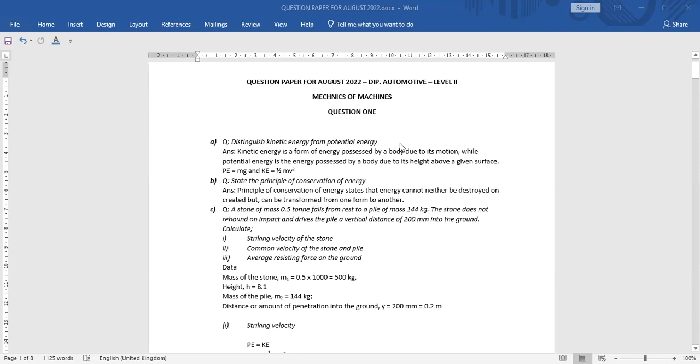So we are looking at the revision package for the question paper for August 2022. That's for Diploma in Automotive Engineering Level 2, subject Mechanics of Machines. Now, as the tradition, this is meant to just gauge your preparedness in this subject. So for each of the questions, you'll see definitions and then the calculations that follow. Now here, I'll try to pick up the first four, and then in the recording that will follow, part 2, I'll also pick up the other 4 questions.

So traditionally, let me start with question number 1. In question number 1, this question was saying distinguish kinetic energy from potential energy. So what is the difference between KE and PE? That's what it is saying. Now, traditionally, when you look at the two, the main difference is the fact that one of them deals with motion, the other one doesn't.

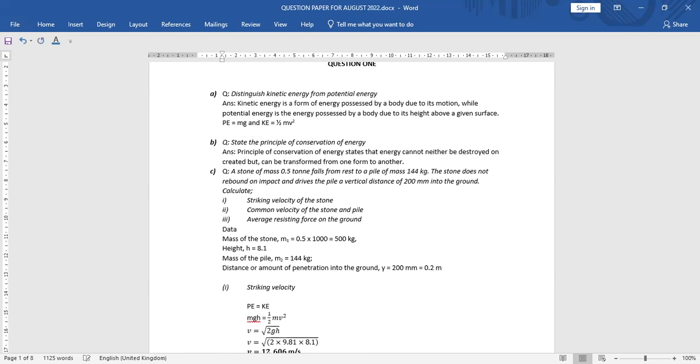But whenever you're trying to distinguish, the best way to do it is to define them in full. Here we're saying that kinetic energy is the kind of energy a body in motion possesses. But potential energy is that kind of energy which a body possesses due to its height above a given surface. Then, to make it complete, you also add the formulas. Now the formulas, please don't misuse them. Those formulas are meant to support what you're writing. When they say distinguish, you don't just go and put the formula and move away. You put them there after you define.

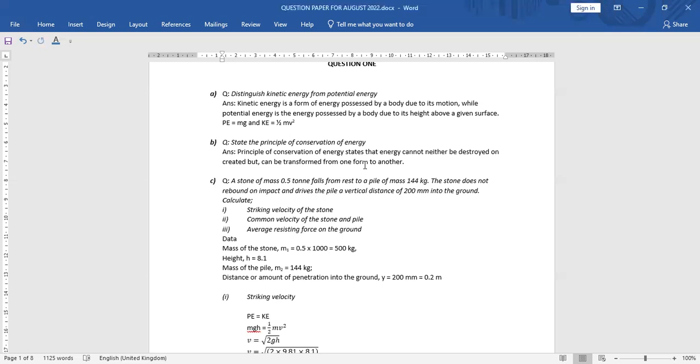Principle of conservation of energy. Here we're saying that you can neither destroy nor create energy. But what happens? That energy has to be transformed from one form to the other. So the question that we had in part C is that we have the mass of the stone, 0.5 ton, and it falls onto a pile without rebounding, driving the pile straight into the ground through a vertical height of 200 millimeters.

Now, the one thing I didn't copy out in the question is that a stone of mass 0.5 ton falls onto a pile of mass 144 kg through a vertical height of, according to that question, 8.1 meters. The condition is that it doesn't rebound. Part 1 is asking for the striking velocity of the stone, the common velocity of the stone and the pile, and lastly, the average resisting force of the ground.

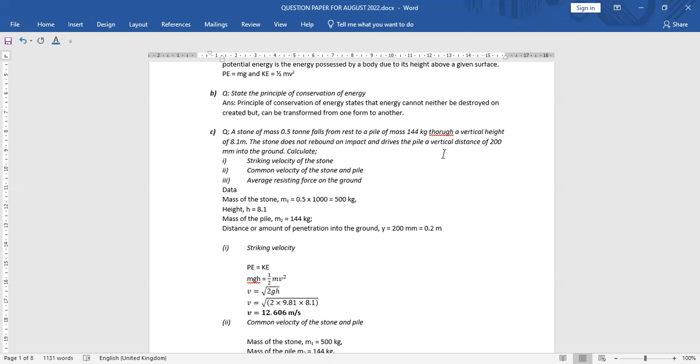So let's pick up the information provided in this question. First, it's the mass of the stone. 1 ton represents 1,000 kg. So 0.5 ton, you multiply it by 1,000, and the answer gives us 500 kg, the SI unit for mass. Then after that, you have a vertical height, 8.1 meters. Mass number 2 is the mass of the pile the stone is hammering, and this is given as 144 kg.

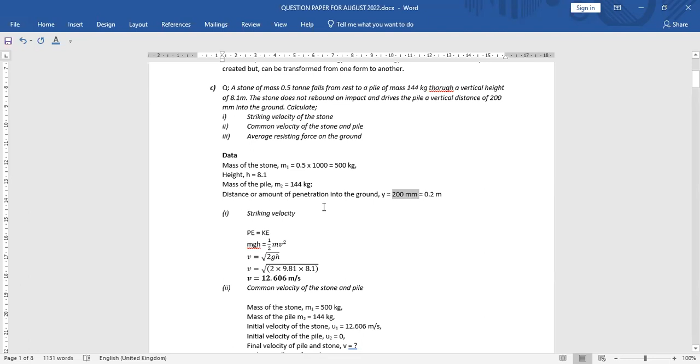Then by how much does it penetrate into the ground? We're calling it Y, and it's 200 millimeters. Again, we convert the height to the SI unit. So 200 divided by 1,000, we have 0.2 meters. Away from there, we are now trying to find the striking velocity: with what velocity is this stone going to hit the pile?

We go back to the principle of conservation of energy, where the potential energy lost will be equal to the kinetic energy gained. Hence, potential energy is equal to kinetic energy. Replacing the formulas, potential energy is mgh, kinetic energy is half mv squared. And this is where this popular formula comes from: V equals root of 2gh. And we just do the substitution.

2 is there. G is 9.81. H, which is the height, is 8.1 meters. You find 2 by 9.81 by 8.1, and whatever you get from there, get the square root. So what it was giving here was 12.606 meters per second.

This is straight away talking about the velocity with which it's going to hit the ground. Now, when you make a step further, the next one is now asking the velocity of the stone and pile together. How? So here, the velocity of the stone and pile is referring to after they collide. We're given a condition that after the stone hits on the pile, they move together. It doesn't rebound, referring to the fact that this is an inelastic collision.

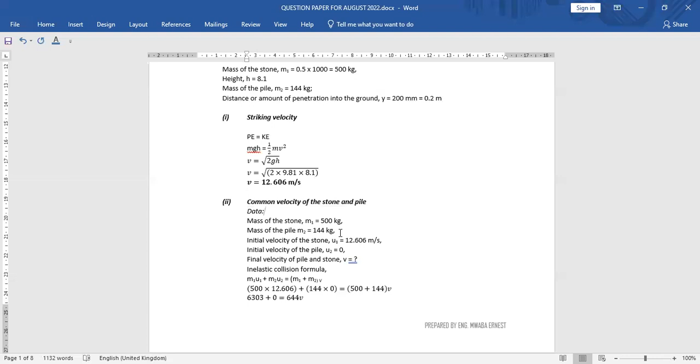And it means, to avoid confusion, we also have to write the data for this. Meaning, here is our mass of the stone, mass 1, 500 kg, mass of the pile, mass 2, is 144 kg. Now, with this, when you move further, you find that the initial velocity of the stone, or rather the velocity with which the stone hit the pile, is 12.606 meters per second. At what velocity was the pile moving at that time, just before it was hit by this stone? It was stationary, meaning the velocity was 0.

Now, the two of them are going to have a common velocity. So to get that, we'll avoid making assumptions. So we're going to consider V to be unknown, and hence our question mark for V, the common velocity. This is where the data ends. So hence our solution. Now here in our solution, we are looking at the expression for the inelastic collision.

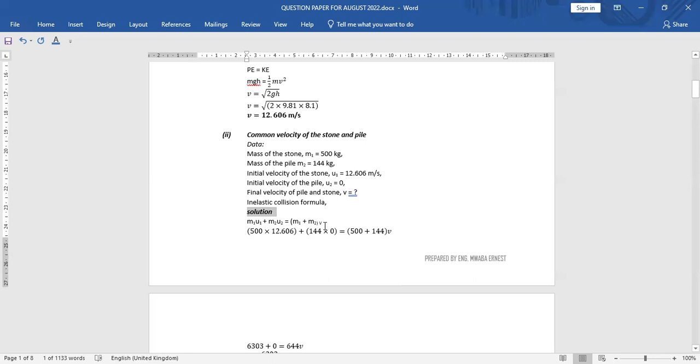An inelastic collision is where, let me just zoom in a bit. In an inelastic collision, you have the two initial momentums. You add them together and you equate it to the final momentum. In the final momentum, because they'll have one velocity which is common, you add the two, m1 plus m2. Then outside the brackets, you have the velocity v.

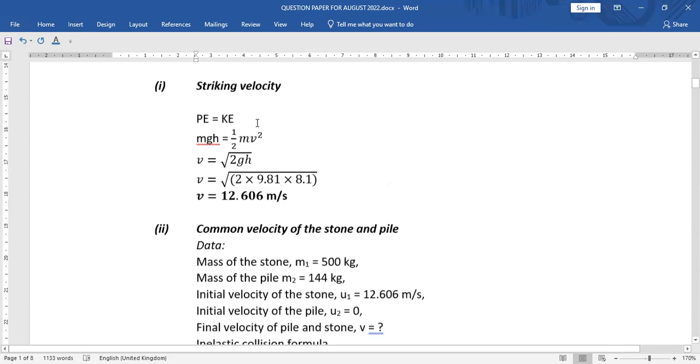Now here, just a quick minute, I just put a v out there. So m1 plus m2, then velocity. And that is our common velocity. Now, let's proceed to do the substitution. Mass number 1, let me go back and check. What did we have for mass number 1? It's half a ton. So that's 500 kg multiplied by initial velocity of mass 1, which is 12.606 before the collision. Add this to mass number 2, which is 144 kg, by 0. Then all this is equal to the two masses, 500 plus 144, then common velocity stands out.

Then what do we do after that? We can now just do the algebra. When you multiply 500 by 12.606, it gives you 6,303. Then you're adding to 0. End result is 644 V. So now we divide through by 644. So that's where we have 6303 divided by 644. And the answer that we are getting is 9.787 meters per second. So that is our common velocity, the velocity with which that combination enters the ground, or rather moves together as one unit.

Now, after that, we were given another condition that the ground had to resist. It only penetrated into the ground by 200 millimeters. Now, how much resisting force did we get as a result of that penetration into the ground? So again, we revisit the principle of conservation of energy. How much potential energy are we going to lose? And what will be the work done in resisting the penetration into the ground? So the total potential energy lost should be equal to the work done by the ground in resisting all that.

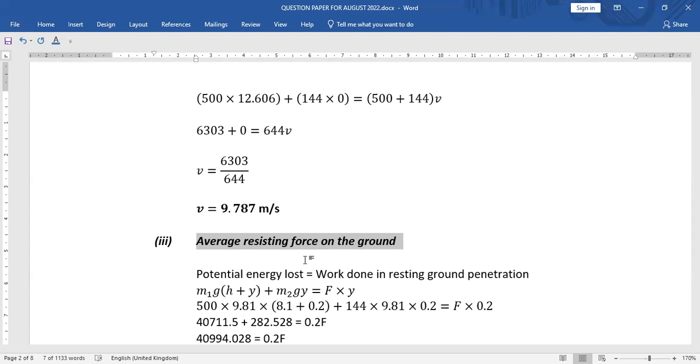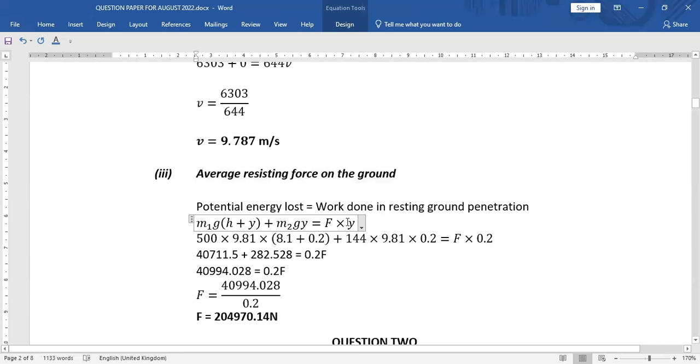So this total potential energy will be, first, the potential energy of the first mass, which went through the total height 8.1 and the y into the ground. Then with mass 2, it only penetrated through that small height, which is y. And it's supposed to be equal to the product of force multiplied by y. In other words, this is the formula for work done, force times distance.

Then from there, now we can just do the substitution. We have 500 by 9.81 multiplied by 8.1 plus 0.2. Then the result should be now the whole of this. And I want to make sure that we put all of this in brackets. So I'll just cage it again.

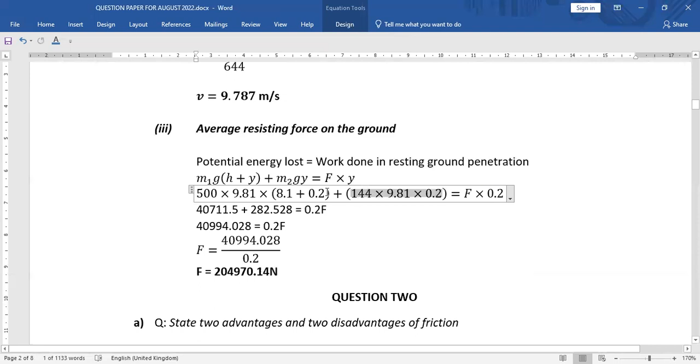So 144 by 9.81 multiplied by 0.2. Then all this is equal to F multiplied by the same 0.2 that we have there. And here again, let me just cage this family here. This one, just give it another set of brackets to make it look unique so we don't mix them up.

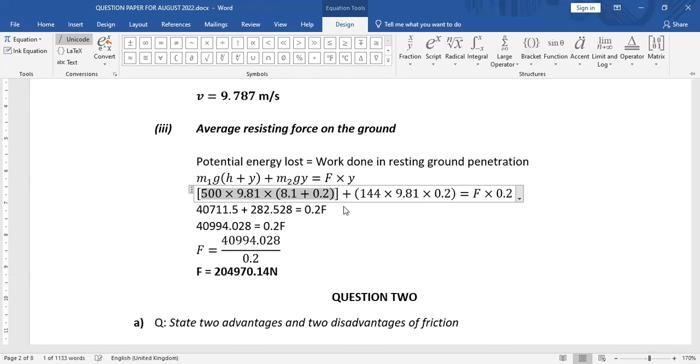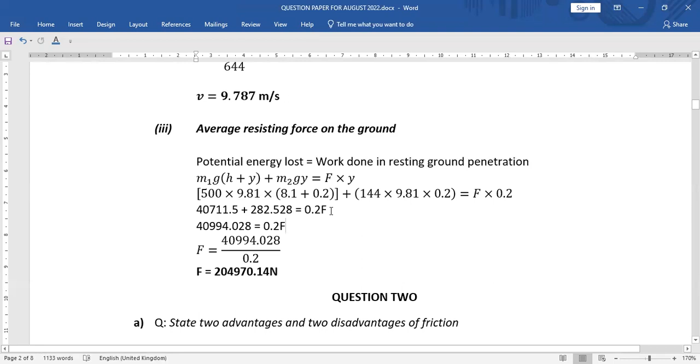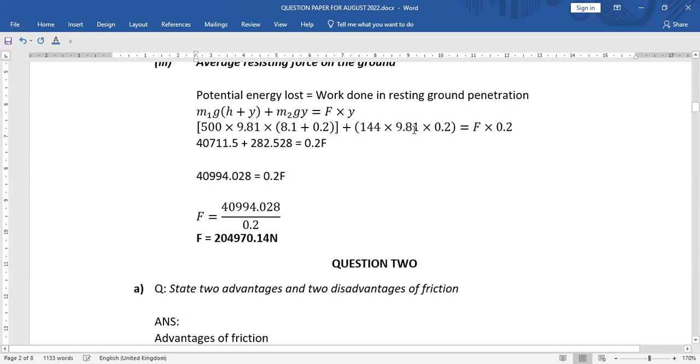So from here, when you enter those values, try to simplify them. You just end up with one number for the first part, which is 40,711.5 added to 282.528. On the right-hand side is just 0.2F. The result of this is now requiring us to divide through by that 0.2 so that you just make F the subject of the formula, because we're looking for the force.

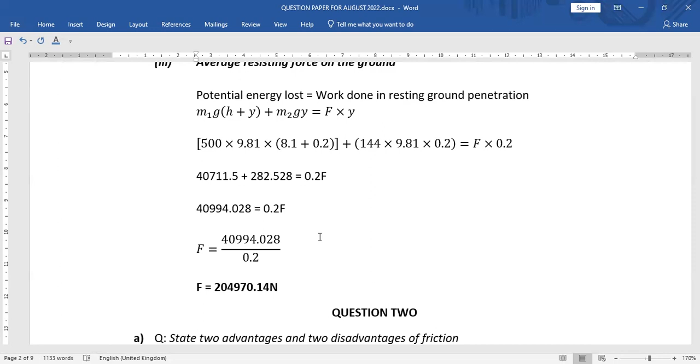And the answer comes out as 20.5, or rather 204,970.14. So that is our resisting force coming from there. If you want, you can call it R.

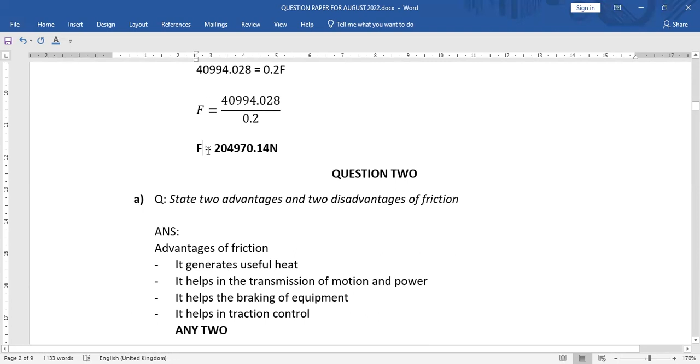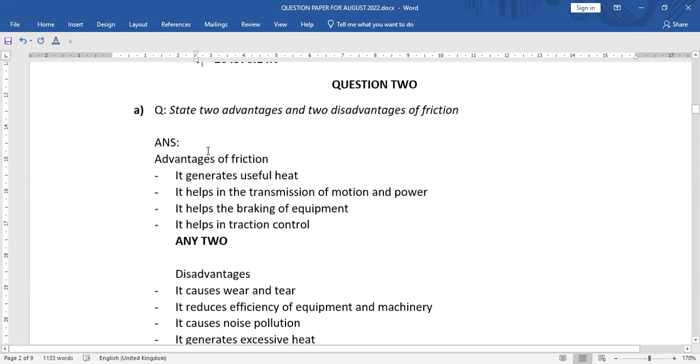Pick up question number 2. Question number 2 is talking about the disadvantages and advantages of friction. Here you can feel free to maneuver. Friction has so many applications. That is where advantages come in. It has so many problems that come from it. For example, useful heat is generated from there.

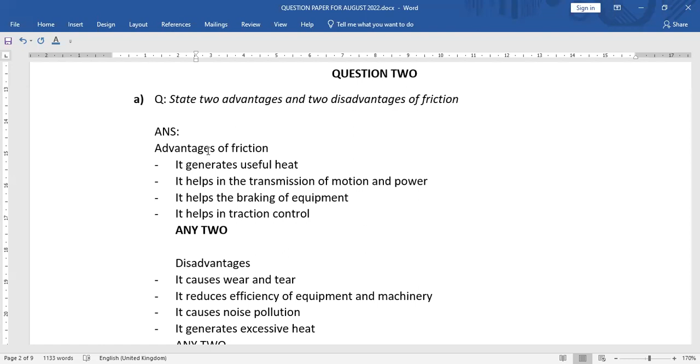If you talk about lighters that we use in the workshop, they use friction. Motion transmission in the belts, in the transmissions there, the clutches, especially the friction clutches, they all rely on friction. Talk about the brakes, even traction control on our vehicles, it's all about the same friction.

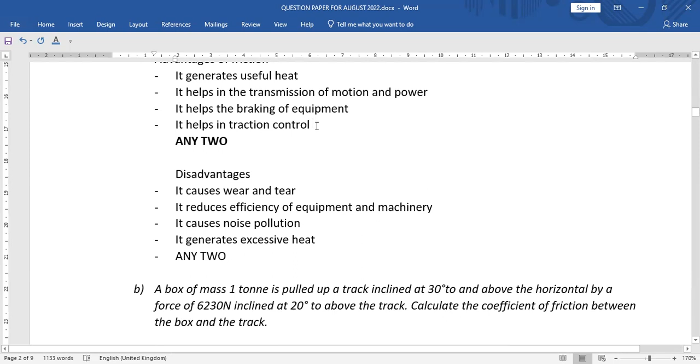When you talk about the disadvantages, you're talking about things like the famous wear and tear, reducing the efficiency, noise pollution, as well as generating unwanted heat or excessive heat in bearings and other sensitive components. Now, once again, here we're saying that you are free to pick any two.

Next, here is our question. It says a box having a mass of 1 ton is pulled up a track inclined at 30 degrees to and above the horizontal by a force of 6230 inclined at 20 degrees to and above the track. Calculate the coefficient of friction between the box and the track.

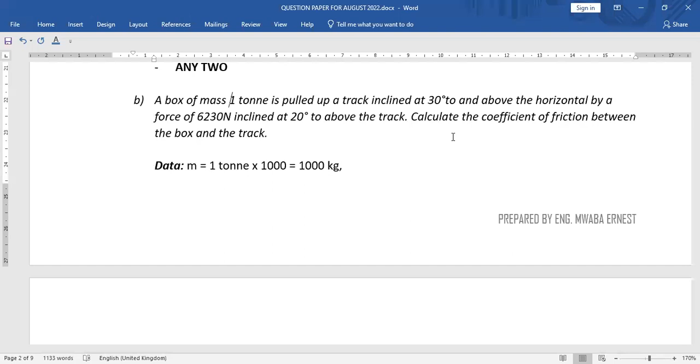Again, we'll start with the data. First, we have the mass, which is 1 ton, converted to kilograms. So here it's 1 by 1,000, then you get 1,000. And we want the weight from there, so we say 1,000 multiplied by 9.81. It gives us 9,810. Then proceed from there, we have the angle, which is theta, the angle of inclination of the track or the plane where this body is resting. This is 30 degrees.

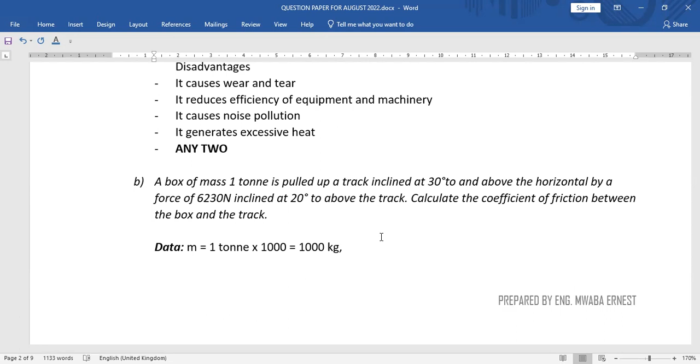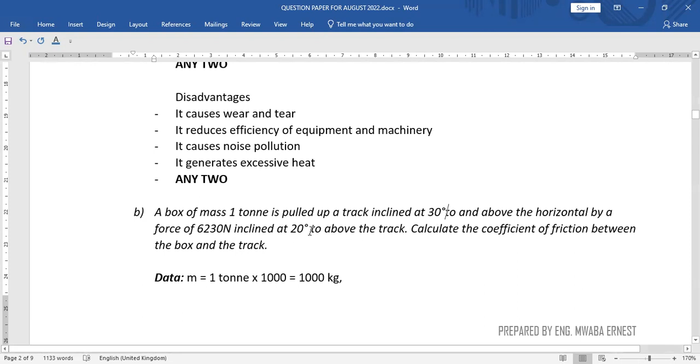The question is saying that this body we are pulling is resting on a track whose angle of inclination is 30 degrees to and above the horizontal, whereas the force is inclined at 20 degrees above the track. Let's put the two together. This is the 30 degrees to the horizontal.

And because the blue line here is representing the track, the angle between that blue line and my force, which is 6230, is 20 degrees. Hence, the angle of inclination of the force above the track, right there, 20 degrees being measured above, not below. You can also have a case where this force is acting horizontally, meaning it follows the x-axis, going straight into that other side, and you resolve once again.

So here we are. We require to resolve these two. So if you look at 6230, it has two components. This one, which is more like an inverted vertical. The other one, also an inverted horizontal. The two components are meeting at 90 degrees. So that's why you have 6230 cos 20. 6230 cos 20 is representing the horizontal axis.

You can always prove this by going back to looking at this box, applying SOHCAHTOA, and making this be represented by just any other letter like Y or X. Make it a subject, then this is what you have. You do the same on the other end.

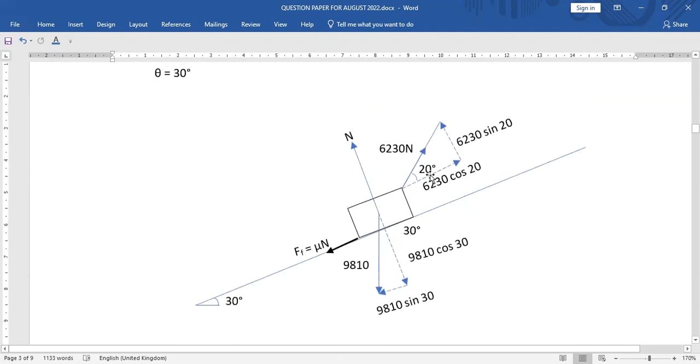If you check parallel or along the plane, the first one I can see is 9810 sin 30. There's also 6230 cos 20. And there's also μN, which is the friction force. 1, 2, and 3. Anything more? I think that is the end. Now check the arrows where they are pointing. Here, this friction force, μN, according to the rules, friction will always oppose motion. And that's why, as you can see, it is pointing down the plane, whereas we're trying to pull this thing up.

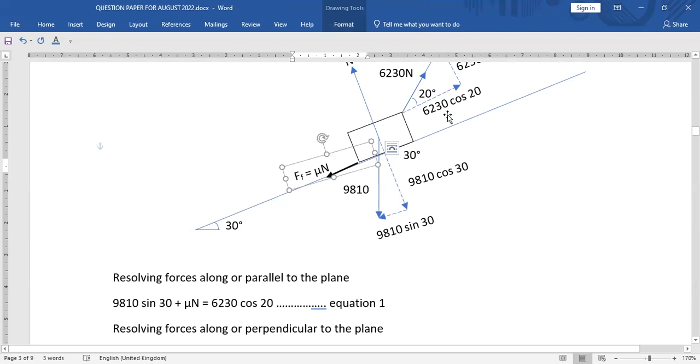Now, the first one, which is 9810 sin 30, and μN, they're acting in the same direction. So then the other one is in the opposite direction. So all we do now is just add the two. This added to that. This is the first equation you're seeing here. We have 9810 sin 30 plus μN is equal to the other one acting in the opposite direction, which is 6230 cos 20. And hence we have this first equation. What I usually encourage is that you don't even disturb that one. You leave it as it is.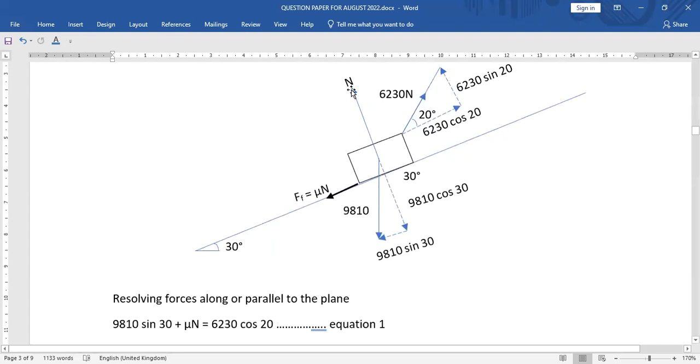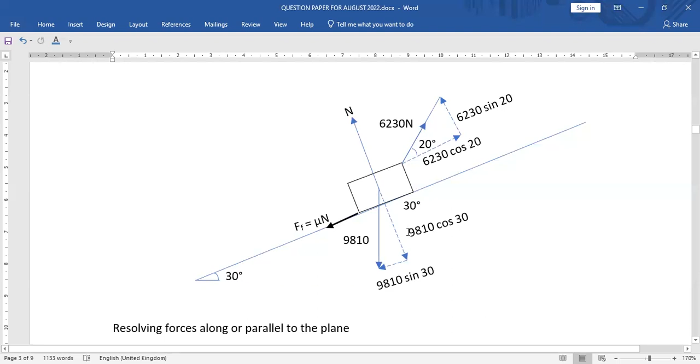Then from there, you proceed now to the second equation. In the second equation, you have N, which is at 90 degrees. So N, the other forces which are acting in that same direction, we also have 9810 cos 30. We also have 6230 sin 20. So I have 1, 2, and 3. Again, let's check out the arrows. The first arrow is pointing upwards. The second arrow is also pointing above the plane, up. The last one is going down the plane, which means it's now in the opposite direction to the first two.

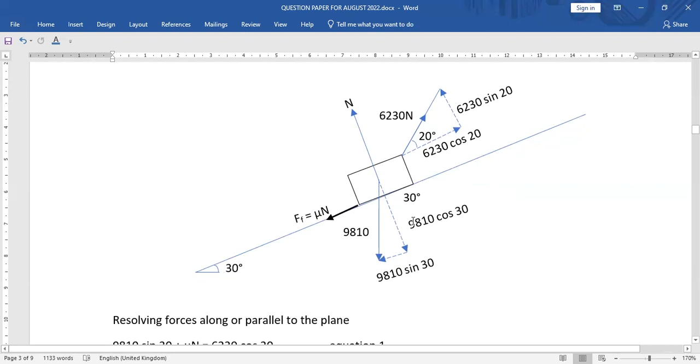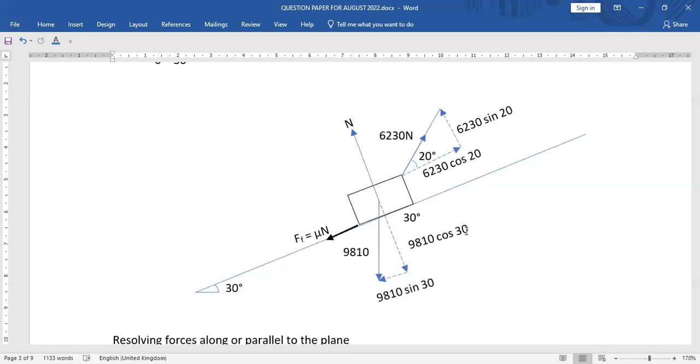Now, what do we do? The two that are pointing in the same direction, we should add them, equals forces in the opposite direction. Just as simple as that. So we will say N plus 6230 sin 20 equals, and on the other side we have 9810 cos 30. That completes our setup, and hence here we are. N plus 6230 sin 20 equals 9810 cos 30.

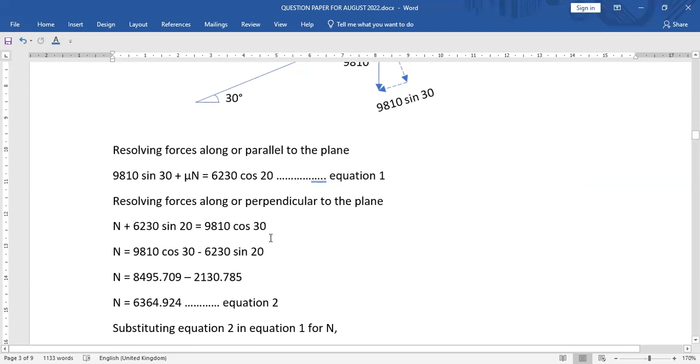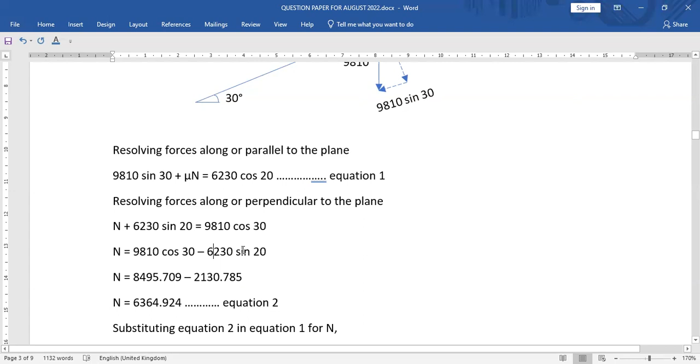So this is supposed to be our second equation, but we can do better than that. Let's make N the subject of the formula. By making N the subject of your formula, you get this part to the other side, which requires that now we subtract. So then we have 9810 cos 30, take away 6230 sin 20. From there, you end up with 6,364.924.

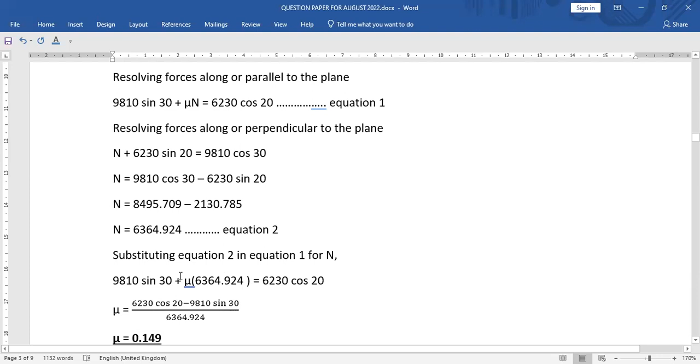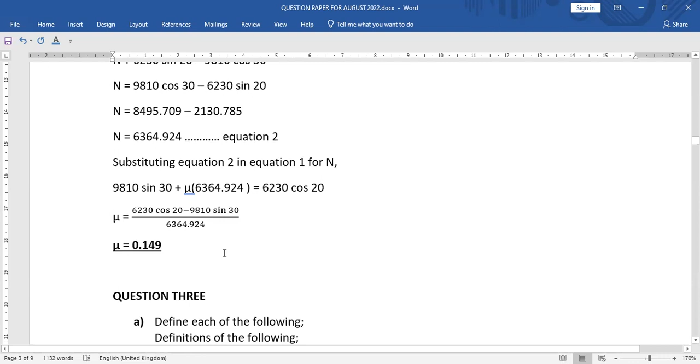Now, this has given us the first equation. The second equation, we've already found the value for N. So this we can now replace in this other equation here, because according to the question, our target is just this. We just want to find the coefficient of friction. And hence, when you do that, where there was N, you substitute 6364.924. The other one remains the way it was, and the other side remains intact. So your μ will be 0.149, which is almost like 0.15. That is how you handle that part of the question.

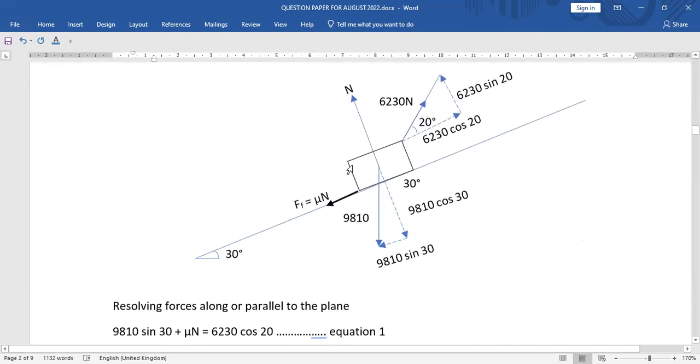Now, my caution is, please do not rush to this question to start solving before you do a good job with a good free body diagram that will show you how things are happening, or rather, a good diagram that represents all the forces, and then you proceed from there. And you have a number of options. Sometimes you connect the free body diagram with the three main forces and come up with a triangle of forces, or rather, a system of forces that will help you to resolve what you want. But basically, this makes your work much easier.

Let's pick up another one. Here's question 3.

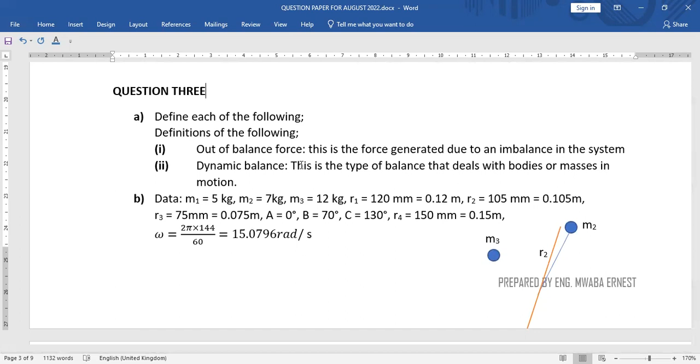Definition: out of balance force, then dynamic balance. Well, an out of balance force is that force which is able to cause vibrations because it's not balanced. A system has ended up with some imbalance because of that same out of balance force. So that's what it is.

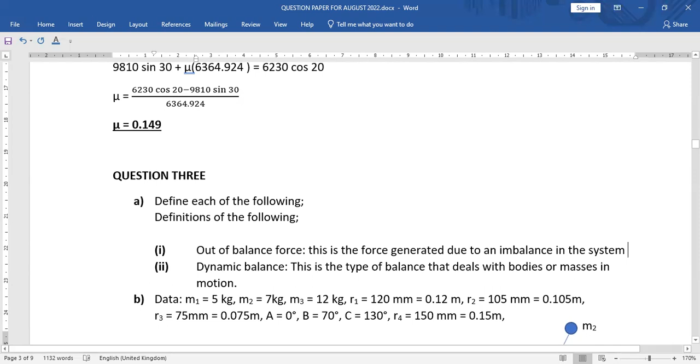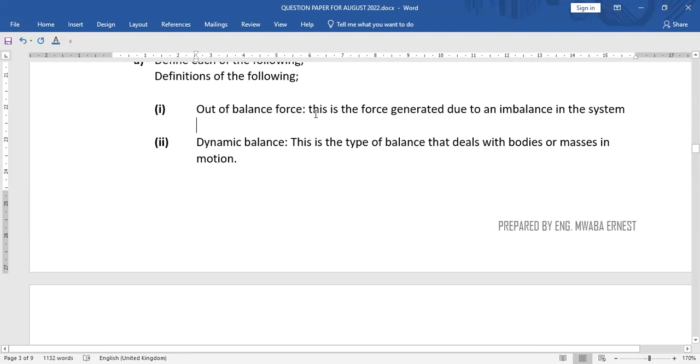And out of that one, when you talk about force that could be coming from a system, it's because of the same out of balance force, which may require to be sorted out. When you resolve, then you know how much mass you need to put there for the system to balance.

Now here we had a question, and in this question we're given 3 masses. Mass 1 was 5 kg, mass 2 was 7 kg, mass 3 was 12 kg. Now from the 3 masses, the radii, or each one's radius from the center, or the radial distance from the center of rotation, the axis of rotation.

The first one was 120 millimeters, which is 0.12. The second one was 105 millimeters, 0.105. And the last one, third, was 75 millimeters. When you convert it, it becomes 0.075 meters. The angles were 0, 70, and 130.

Now, the way the question was phrased was that the angles given were only for B and C, measured from A. B was at 70 degrees from A, C was at 130 degrees from the same A. To make sense out of this, again, here is a small diagram. I can still call them 1, 2, 3, representing A, B, and C. It's still the same thing.

So mass 1 at R1, 0 degrees. Mass 2, this one, 70. The third one, 130. And the angles are neat like that because as we start solving, this is how we are going to use them. So here, resolving in the horizontal axis. Now, what I've put here first is just a clue to show us how we are going to be resolving this.

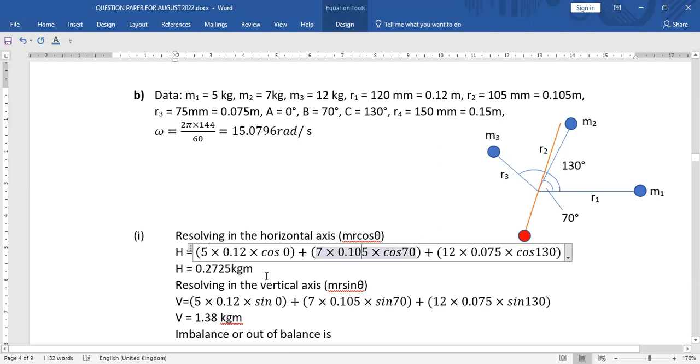What you are seeing here, you can enter it in your calculator just like that, and it gives you that number. Or you may decide to enter one by one. The first set, you get the answer. The second one, get the answer. The third one, and then you add them up. The result should be 0.2725 kilogram meter, because you're multiplying mass by radius. So that's why it's ending up as kg meter.

Let's do the same for the vertical axis. The same thing we did up there, but this time where there was cos, we introduce sine. And we continue like that. 5 by 0.12, here we have sine 0, the other one sine 70, the last one sine 130. The rest of the information remains the same. So what happens to this? Your V will end up being 1.38.

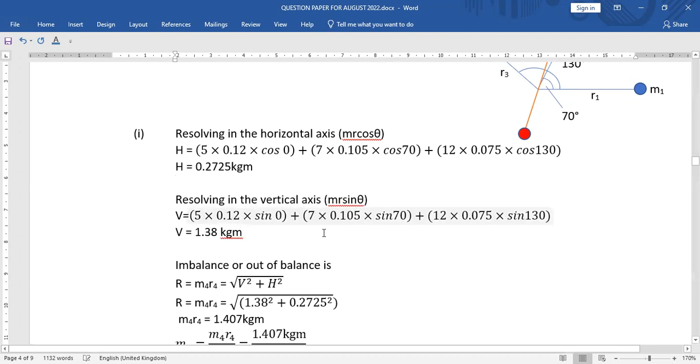What is our imbalance? Our imbalance or out of balance is simply, we now introduce Pythagoras theorem for the two. So we say R, which is M4 R4, is equal to the square root of V squared added to H squared. So let's now substitute. So you have 1.38 squared plus 0.2725 squared. And from there, the answer comes out as 1.407.

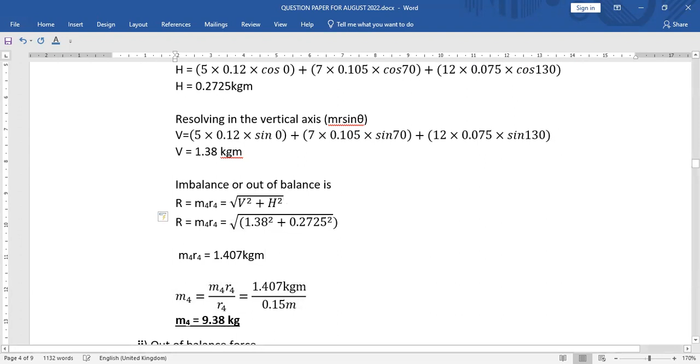Now, here we are looking for mass 4. If you take what we wrote here, we're saying that this is M4R4, which is in kg meter. So M4R4, can you please tell us what R4, the radial distance for the fourth mass, is going to be? We were given already that the radial distance for the fourth mass, the one that is needed to restore balance, is supposed to be positioned at 0.15. So that's why we say, let's divide by 0.15.

And the answer is 9.38 kg. This is what you need to create balance for this particular system. This is the mass that you require. Now, the other part that was required is, can you tell us what the out of balance force is?

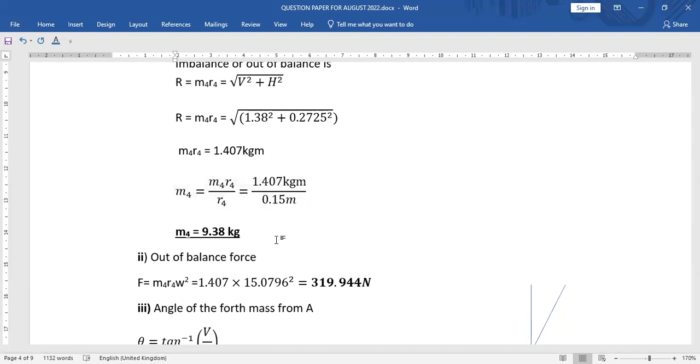How much force is going to come from this imbalance, so that we also know how much problems or trouble we're causing to the system? Perhaps the bearing may start overheating, or that wheel will start wobbling until we reach a point where the components are so worn that you have to now go and start replacing them.

So here, we go back to the force, which is the centrifugal force, because this is a rotating member. And the value for omega was provided, which was 15.0796. It has to be given. This is the angular velocity. If it's given in revolutions per minute, always remember to convert to the SI unit, which is radians per second. So what you see there is already converted in radians per second.

So the replacement looks a bit unfair, because M4R4 as a set, as a pair, can be checked here. It's 1.407. So there you have it, 1.407 multiplied by omega squared, and our omega is 15.0796. So then the answer is a force of 319.944 newtons.

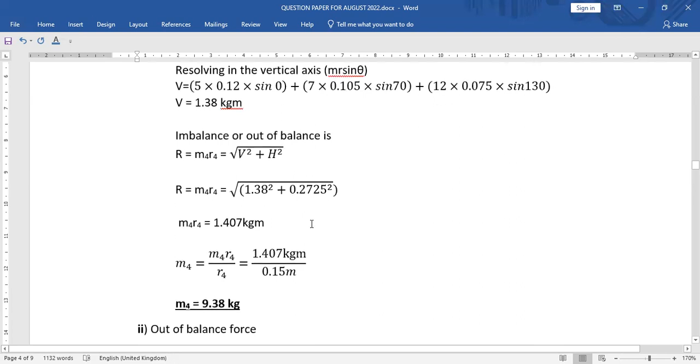Now, the last part on this question was asking for the angle, the angle of the fourth mass from A, from 0. So that's where we introduce tan inverse. So tan inverse of V over H. Check your V. Our V was simply 1.38, and our H was 0.2725. Now, tan is a very special one. You can even say tan inverse of 20, tan inverse of 1,000. Bigger numbers are accommodated, unlike sine and cos, where they all have to be 1 or below 1.

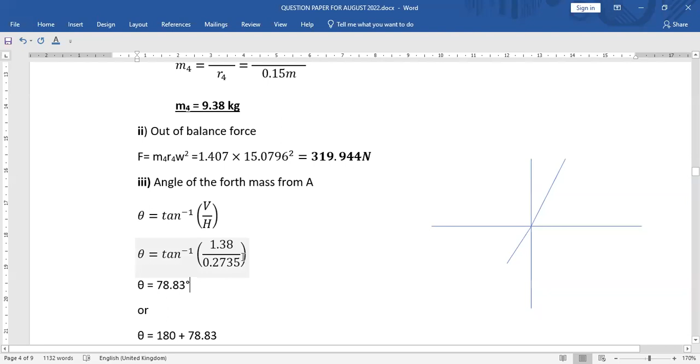So what is tan inverse of 1.38 divided by 0.2735? Of course, you can always get one value from here before you go to the tan inverse. It still ends up with the same thing. The answer we have is 78.83 degrees. Or, because this is trig, the way the angles behave, they always come in sets. So this is in the first quadrant.

ASTC: all angles in the first quadrant are positive. In the second quadrant, it's only sine. The third quadrant, that's where tan is positioned. So let's get the equivalent in the third quadrant for this one. What do we do? You take the same 78.83 and add it to 180. So what you get after that is 258.83 degrees. That is the angle.

Now, here's where you have to be a bit careful. This is not basically mathematical, not entirely, but that's where we're starting from. From the mathematics, we have these two answers. Now let's go back to our technology, the way things happen in the workshop, the mechanics of machines way. So here I have my three masses. Mass 1 is here, mass 2 is there, and mass 3 was just here.

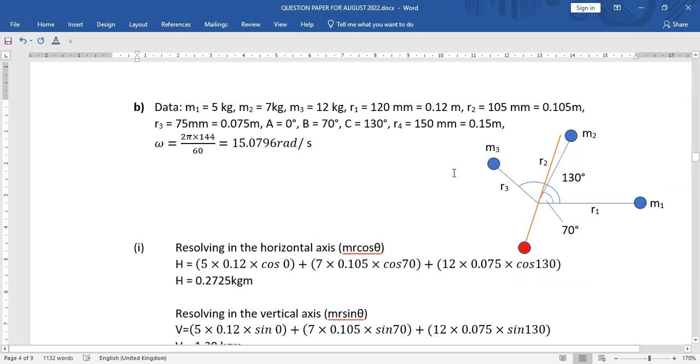According to the answer, I can put mass 4 here on top. But naturally, is that wheel going to balance? Mathematically, it will be okay. But if I run this wheel at the same speed, it will start wobbling, making noise, vibrating, because it's not balanced. Because it's very heavy on one side, when I give it a small push, it will always come to rest with the part between M2 and M3 coming to the lowest position.

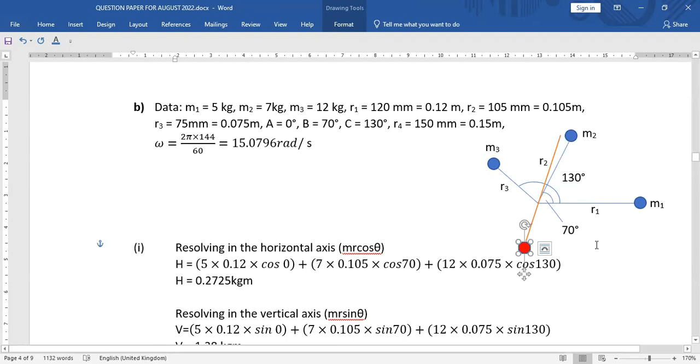So then what? Let's pick it. We can either put it on top or below. Looking at the way the numbers are, it tells us that this should be positioned below there. And hence, the correct answer that we should pick of the two is this one here. If you go back to wheel balancing machines, it will indicate where you're supposed to put that lead weight, and this is where it is going to settle. When the machine starts giving false errors, you can always do a quick test and recalibrate that machine, and you will know whether things are running fine.

All right, I've just handled the first 3 questions. Let's meet again in the last parts, so now I'll pick up the last, almost the last 5, so that we proceed from there. As usual, this is your revision package.